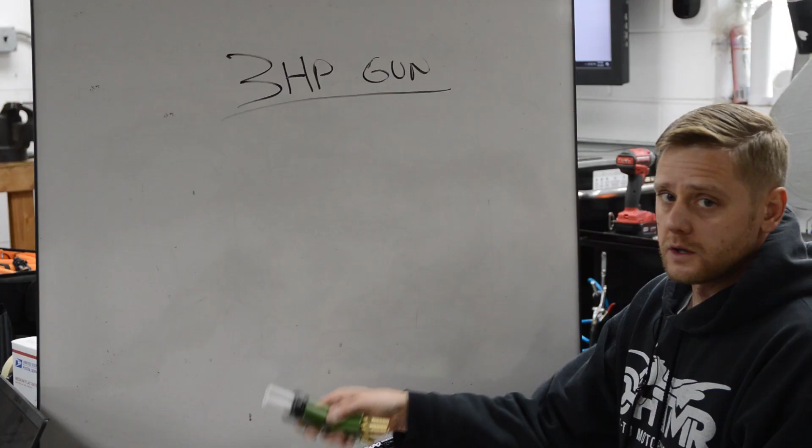So it's been a few days since I said, hey, who would be interested in a 3 horsepower 10 CFM version HTMR gun? And a lot of you have given feedback saying, yes, I'm interested. And no one really said, oh, I need more or I need less. So right around, let's say 10 CFM was the goal.

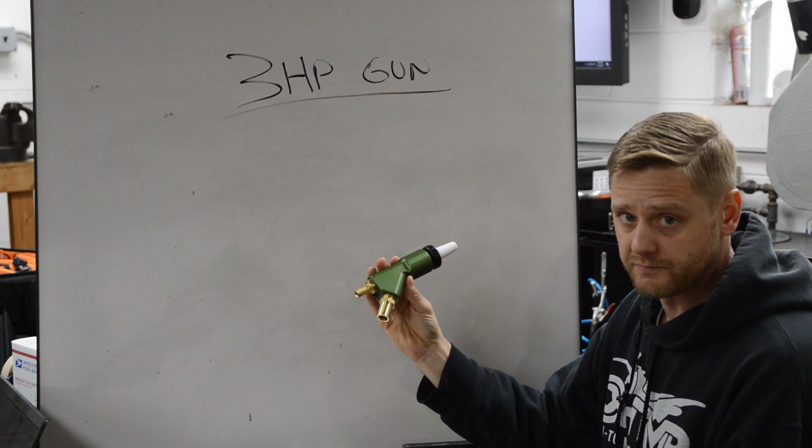Okay, so what I have here is a prototype version that I just kind of cobbled together here, and we're going to demo it. And then I'll get feedback from you guys once again, and if everyone's cool with it, I'll place an order for parts, and we are 2 to 3 months away from having them available to ship. Okay, so let me just kind of go over this guy.

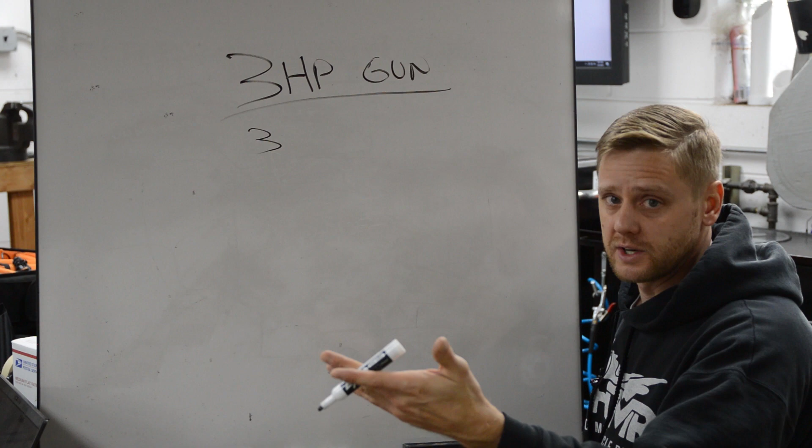Okay, so I try to size the jet and the nozzle to be the same. So for instance, I got the 5 horse gun, which has the 5 horse jet and the 5 horse nozzle, right? And then you can put the 7.5 nozzle in there as well for polishing or getting into a hybrid gun where you can boost the pressure and get into higher CFM to get an in-between size.

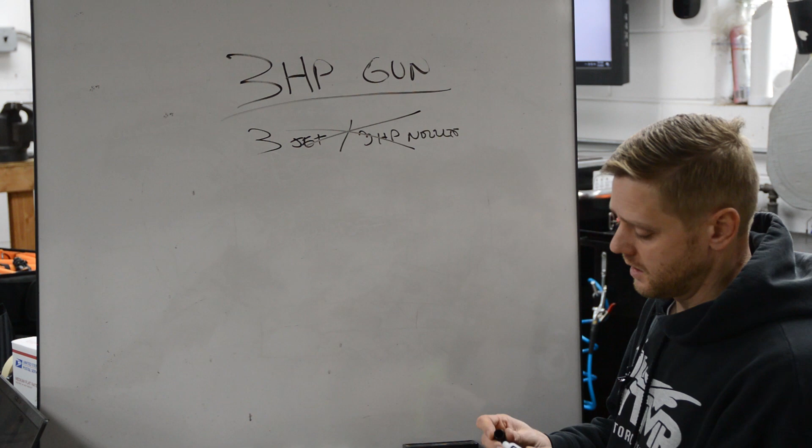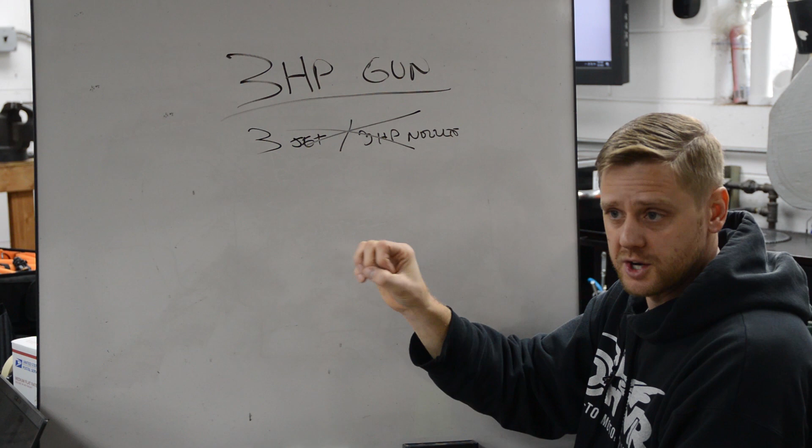But anyway, I tried a 3 horse jet, 3 horse nozzle, and it didn't work. Okay, the reason being is this nozzle creates too much back pressure. I mean, this hole size is very tiny and it'll flow slurry, but as soon as you start cranking up the pressure, it starts spitting, pulsating, and that's an indicator that there's too much back pressure and you need to go with a larger nozzle. Okay, so what I came up with here is a 3 horsepower jet and a 5 horsepower nozzle.

Okay, so this gun is configured like my other guns for polishing mode. But if you need more cutting action, all you do is you jack up the pressure. Okay, and that's true with my other guns. So what I'm going to demo is this here, and it works pretty damn good. It actually works really good. It consumes a little less air. It doesn't work as good as the 5 horse gun, obviously, because you don't have the CFM behind it. Okay, but it works great. And if you need more cutting, you just crank up the pressure.

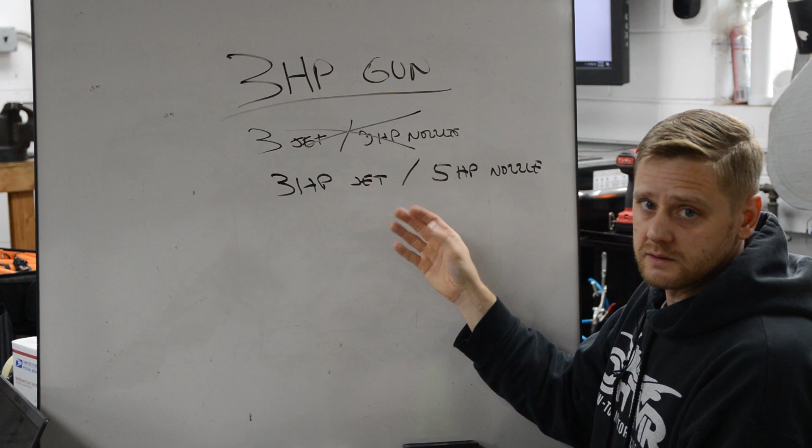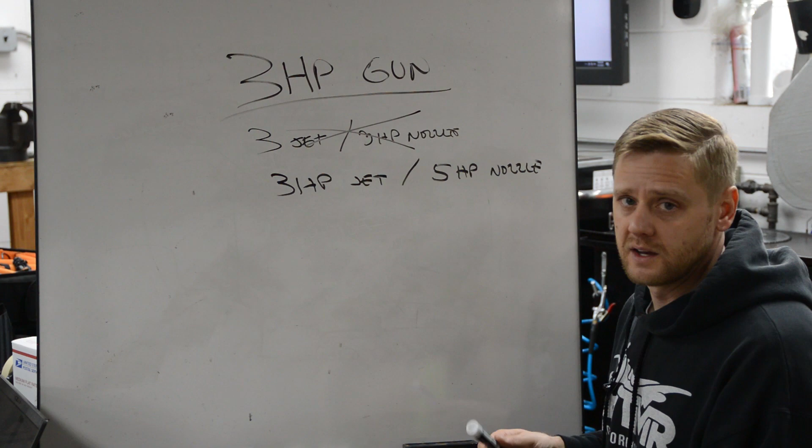So what I'm going to do is I'm going to jot down some CFMs at different pressures for this gun so you can get an idea of what it consumes, and then I will demo it at like 40, 60, and like 80 or 90 PSI or whatever, so that way you can see the level of cut. Okay, so let me just jot this down really quick.

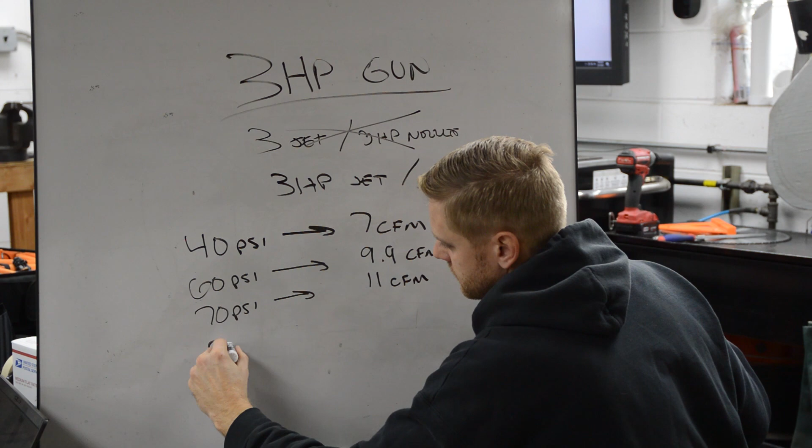Okay, so here's the consumption, and this is true with any gun. When you increase pressure, you increase CFM consumption. Okay, so I normally rate all my guns at 60 PSI. That's the general blasting pressure. Well, it does 9.9 CFM at 60 PSI. At 40 PSI for polishing, you increase your distance, decrease your pressure for getting that bright polished look, 7 CFM.

If you need more cut, 70 PSI, 11 CFM, 80 PSI, 12.5 CFM, 90 PSI, 13.8 CFM. So this is like your cutting, your super cutting speed. You got to jack up the pressure, but it does pretty good at 60 PSI as well. But I'm just going to call it a 10 CFM gun, okay? But keep in mind that this is probably the operating range of this gun.

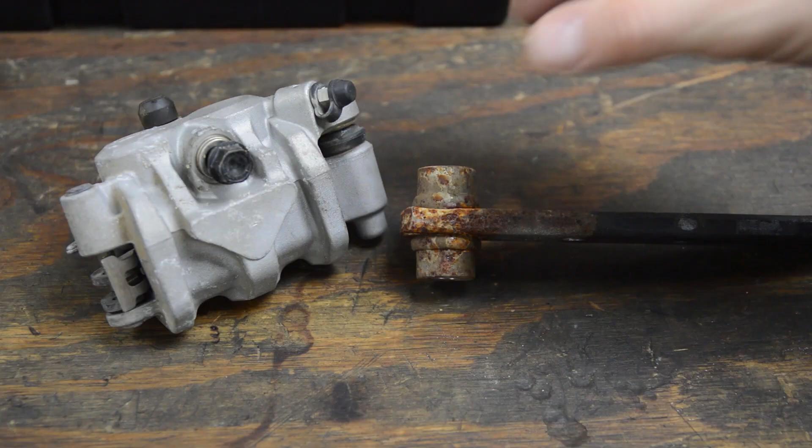Okay. So that's the gun. Let's demo it. I think it works great. I think you guys will be happy with it. Okay, here's some parts I have laying around that we're going to blast. Here's a caliper off a dirt bike, and I believe these are painted gray. So this part isn't too bad, but we'll see if we can remove some of this paint. Just clean it up, and then here I got a part that is rusty. This part here on this side, you can see I've done a little testing, so what I'll try to do is blast this area right here to see how well it works, all right?

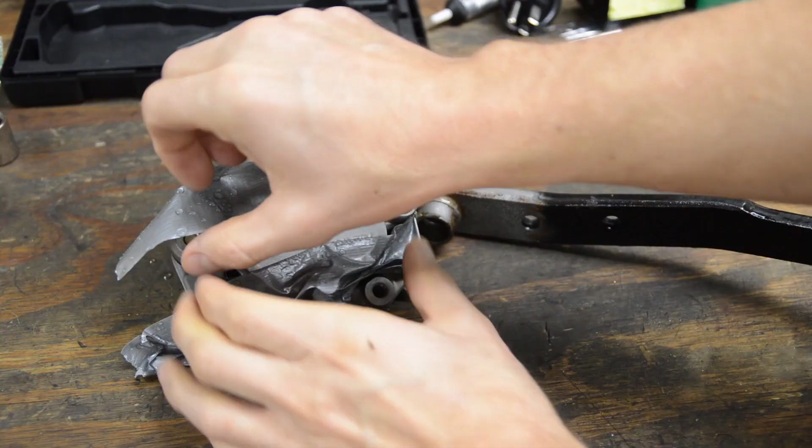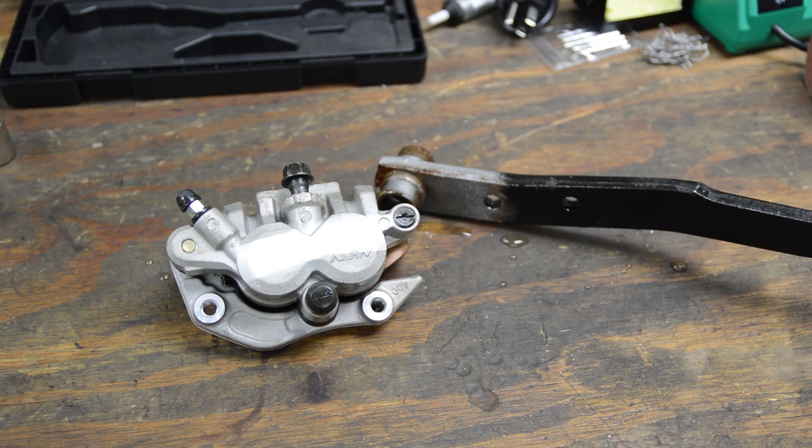All right, here are the parts. I always like to tape off and do a before and after. This part isn't bad at all. It cleaned up extremely fast. And then here's the rust. It blasts the rust off, no problem. So the gun works good. It's super smooth. It flows nice, and it does the job at a lower CFM. So hopefully you guys with smaller compressors can still make good work of this process. All right, guys. So that was the demo.

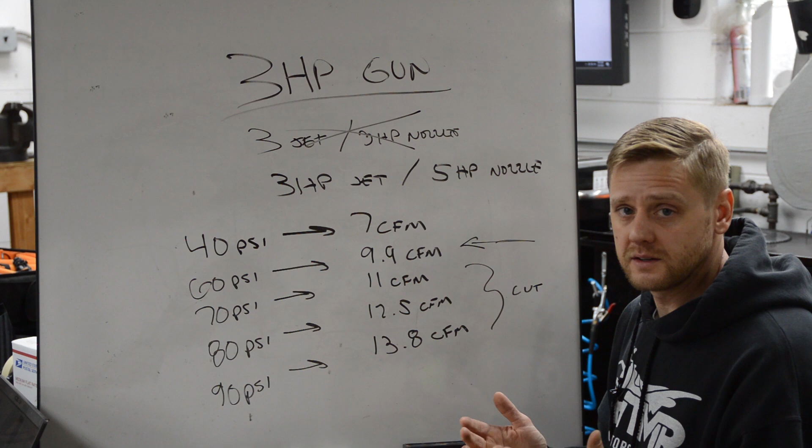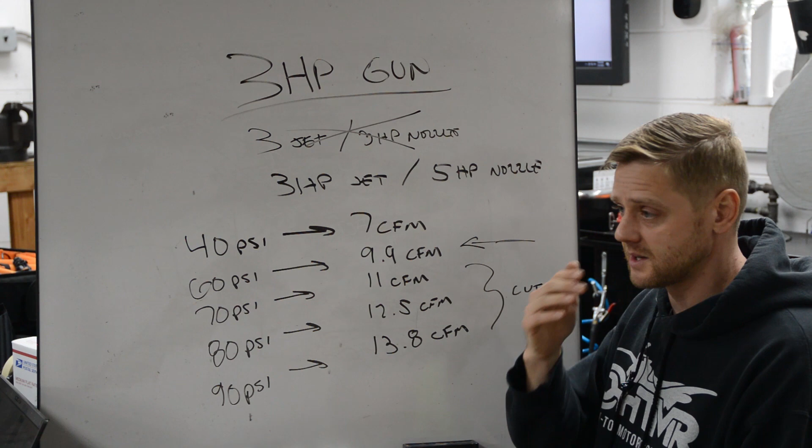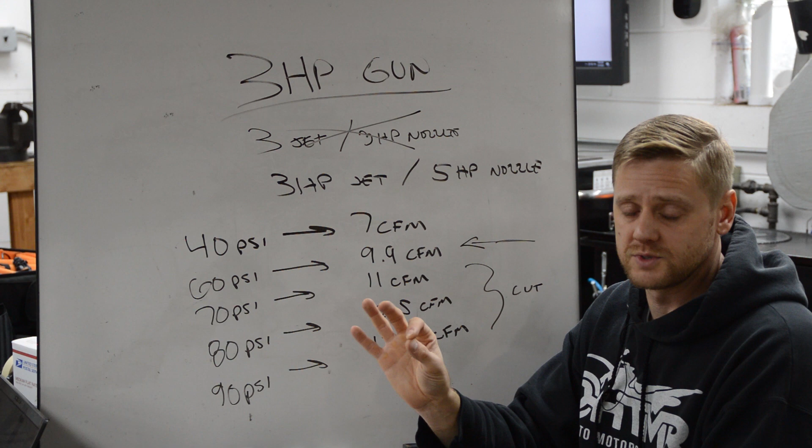And also there's a question in there, how much CFM do you want to consume? If any of this changes, just jot in there what you want. But I think the general consensus is about this size and this CFM, and it works well. So we'll go with this for now unless I hear otherwise.